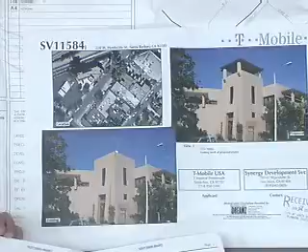Good afternoon, board members. My name is Ryan Shields. I'm here representing the applicant, T-Mobile West Corporation. We've been before you a few other times on this project. To condense the plan modifications, previously we had submitted applications with larger screen walls towards the rear part of the building that borders 101 and the freeway. Subsequently, we're coming back with antennas incorporated into column elements on top of the existing tower feature. Throughout the building there are existing columns and a lattice-type tower built with 4x construction, and now we're coming back with antennas located inside these columns. It isn't quite ideal from a technical perspective as far as the antenna and signal propagation, but it was kind of our last attempt at trying to get something to work on this building.

While this may not apply with your new application, I'll just read the last minutes so that everyone is up to speed: continued indefinitely to full board with the comments. Return with a completely revised plan that does not increase the height of the existing building and does not appear to be massive in scale as the proposed project currently does. Any additions to the building should be appropriate to the architecture and appropriate in scale.

Okay, yeah, we are increasing the height. It was just technically not feasible to do that, both from a signal propagation standpoint, but also to architecturally encompass these antennas in there.

May I turn the page on this? Yeah.

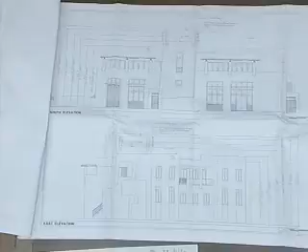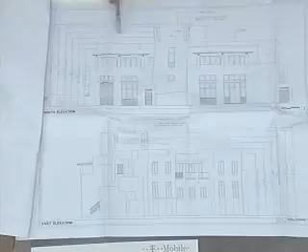So A3 calls out the existing tower element comes out at 39 feet 6. And the columns that exist on the building, there's a landing on the second story on both sides that would flank the tower. These columns currently measure 7 feet 7 to the top of the column, and then about 2 feet of lattice work on top of there. So we'd be proposing to replicate those exact same dimensions and column features on top of this tower. There's about 2.5 feet below the column that we would locate along the existing parapet of the roof and then go up from there. So overall, the height increase goes up to 47.2 from 39.6, which is within the 15 feet allowed by code.

Okay, is that it? That is it. Yeah, the ground-mounted equipment stays in the same location, which is in the rear portion of the building. It's not visible from public view - it's hidden by some decorative plastered walls.

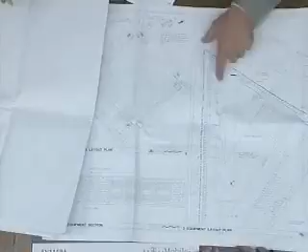I can go back to the site plan. Okay, this is the ground-mounted equipment in the back. You can see the antennas located in the proposed column. And here's the site plan. The antennas will be connected to the ground-mounted equipment via coax cable that'll go up inside of a chase right here, that will not be noticeable. It's kind of blended in, and then it will penetrate the tower right there on the north side.

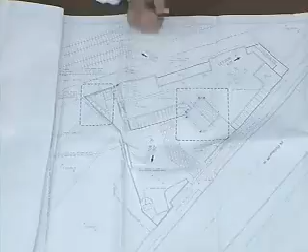Okay, is that it? So with that, I'll bring it open for public comment. Seeing no one, I'll bring it back to the board for questions.

Keith: Thank you, Mr. Chair. So just to reiterate, all the new equipment in the tower portion would be totally concealed - there'd be no exposed equipment at all. That's correct, the only penetrations that would take place - there's about a 2-foot tall parapet back here, so any penetrations with cabling to the antennas would take place below that sight line.

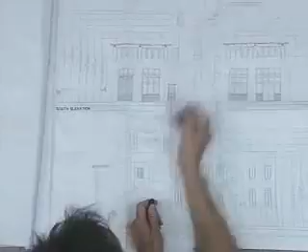I think, let's see how that would be turned. Oh, I'm seeing this beam here. Exactly, that's the larger beam, right? No, that's this beam here. That's what you're saying, exactly. Okay, all right, I get it.

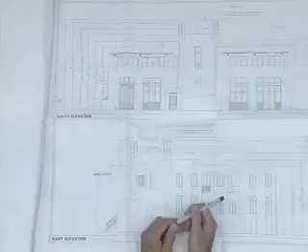I do have one question. I just noticed that the elevation, maybe you mentioned this and I was looking at the plans, but on this elevation it shows columns on both faces, but on the photo sim you only have columns on the east and the west faces of the tower instead of the north and the south. You're showing the columns on the corners, and on the photo sim you're only showing it on the east and the west sides. Are you missing something?

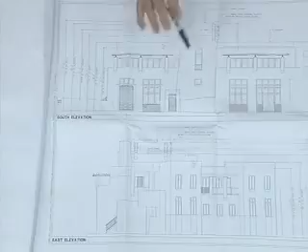No, I'm sorry, you picked that up, and that is correct. This must have just carried through from a previous revision. Originally we had 8 columns, and after reviewing it and taking a look at it, it was too massive, not enough kind of open space in there. So we knocked that down to 4.

Let me find the site plan. So these don't exist anymore. Let me see, those, how did we do that? Yeah, these 2 we took away and those 2. And that was actually at the owner's request.

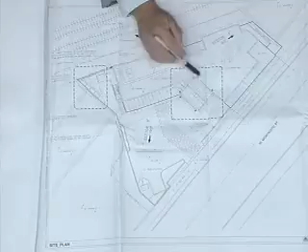Subsequently, signal-wise, we end up losing some from these. We lose these 2 antennas, and so we only can get this one, and that one has to be skewed that way, but that's more on our side than yours.

All right, okay. So, any feedback as far as if you like the 4 columns better than the 8? That's coming next, we just had to ask questions first. Okay, I have no other questions.

Comments? Start with Keith. You ready? Thank you, Mr. Chair.

I think it's a good solution, particularly in light of some of the previous proposals that really increase the mass of the building. I think this integrates with the existing architecture, and it actually makes the building look better. Definitely think you only want the 4 columns. The only suggestion I would have would be maybe study whether these columns want to come a little further down the facade, just they look a little stubby up there, but I'll see what everyone else says. I think it improves the building, actually, so I think it's a good solution.

Thanks, Keith. Dawn? I wasn't here amazingly for the last 2. One was way back when, in 2009. And I happened to be absent at that one as well, but I just reviewed the 2 previous submittals to get up to speed, and I agreed with the last comments, and I think that this solution is vastly superior than the last 2. I think that the detailing needs a little bit of work, but I don't think that it is a negative, massing impact on the building. I like the building as it is, but I don't think this is a negative impact necessarily to the building.

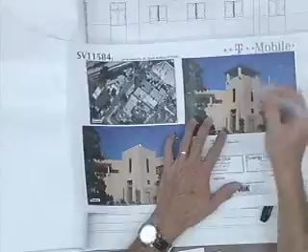In other words, you keep this length consistent, but you lower everything so it slides down the face of the wall here on each side, and reduce the height between that and that. And I think when it becomes like a happy point there, it almost becomes like a designed floating cap to the tower, as opposed to almost a whole new floor that has this trellis on top. You know what I'm saying? So I'm just posing that question to you. I don't know, I'd like to hear what you'd have to say.

You've heard my comments. Yeah, on top of there, from a site plan perspective, sorry about that, it's about a 2-foot parapet or so, maybe closer to 3, but looks somewhere in there. Tall here. Yeah, and there is a roof. That's almost a 6-foot parapet.

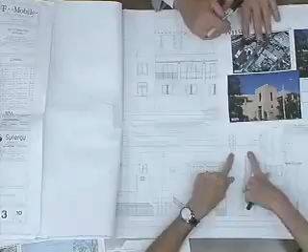No, except that's the header of the window. Yeah, that's the header. It has to be up here. So it's up there, 3-foot parapet. I purposely included the picture of the story pole in there, and that is about waist level on me, so figure 2 to 3 feet somewhere in there. It's right about here because that's somebody standing right there.

One of the things we definitely looked at was structurally what we had to tie into in order to make this work. By the as-builts, there's some 12-inch block down below, and then I believe 8-inch on the top with some bond beams around there. So I think from kind of the system perspective of the building and the structural aspects, to really lower that...

I guess everything's possible. It may be a little complicated on the structural side of things. There's also a skylight in there that takes up the majority of that. That's actually a pretty nice kind of light shaft that comes through. This is an open staircase. So I guess we'd have to look at it a little bit more from a structural standpoint.

I think there's a solution. I think at this height, it just borders on being the addition, just because of the cell phone towers. It's not fully comfortable for me, but I feel it's an innovative solution, and if you could find the ability to enhance both the building by bringing these things down a little bit and possibly bringing all of that down, I think there's a good compromise that could work. That's up to you. We would be talking about only maybe 2 feet, maybe 3 feet if we went to the extreme portion.

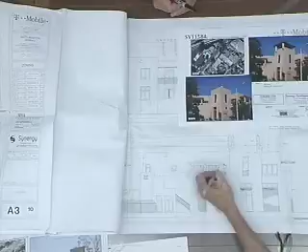Would we like to see it match? We kept that exact same dimension, so that's about 2 feet 7 inches below that balcony edge, and that's exactly what you have here. It looks like this dimension from here to here is just a little bit smaller than this dimension from here to here.

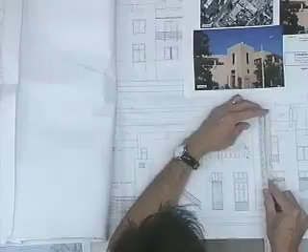So this is 3 foot 6 above the parapet, okay, and this is 4 foot 6. This is 4 foot 6 above. Yeah, okay. And this is about 2 foot 3 or 4 below, and this is 1 foot 9.

I think that the base should be 1 foot 9 below. The base should be the same, if not a little bit more. Maybe exactly the same proportion as here or here, but it is a little wider, so it could stand to be a little bit bigger.

I just think it could be lowered. I agree with you that it could be lowered slightly, but I wouldn't want to see it lowered to make it look like a cap.

So I mean, I see bringing it down more in harmony with this, I think, is a better solution for me. I'd like to see that. So I think that.

One foot 6 or so, something like that. 1 foot 4, 1 foot 6. You know, I don't want to say exactly. I just think it should be closer to this. It should be consistent with what's there now, and I think that's where the design refinement should go.

Is that a motion? So you want to see how it flies? Let's fly it. Okay. So, Mr. Chair, I'll make a motion for project design approval.

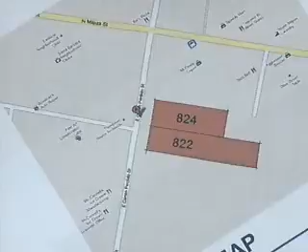So I'll give an update as to where we're at in the process, and Ryan will take you through the design. We've been working with staff and gone through a PRT process, and a couple weeks ago we presented to the Planning Commission for conceptual review as well, because we wanted specific feedback on some modifications we were requesting. Those modifications primarily were first for a reduction of the parking requirement. We're proposing one vehicle space per unit, plus the 3 required guest spaces on site. No modification there, just for the 1 per unit.

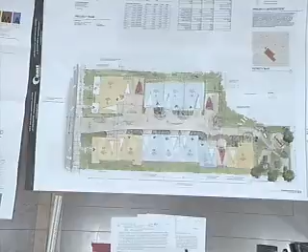A modification for building setback between these two buildings, a modification for the bonus density of 12 units, and a modification for reduction of the setback in front per implementation of the pedestrian master plan. Ryan will take you through the specifics of that. The Commission was very supportive of the bonus density and very supportive of the parking modification as well. Back and forth on the building separation, but understood it, but really requested that we not come back with any modifications for the front setback and to implement the pedestrian master plan. So we'll show you what that means in more detail as we go along.

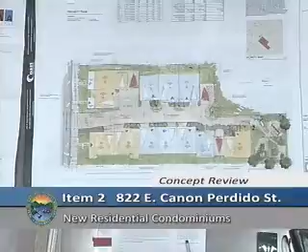So the project was purchased through RDA funds at the end of last year, and we're moving ahead quite quickly. The project represents new homes for 12 families. We've had very good feedback from staff and the commission as well, and it's important that we came to get your feedback too as we develop the design, so that when we submit our formal DART, we're really well set up to move through expeditiously in the process. So we look forward to your comments, and I'll hand it to Ryan for the design.

Well Chris, do you want to set over here? Do that.

Okay, we'll start here just to locate us. So we're one parcel off of the corner of East Canon Perdido and Milpas. There's a commercial property to our east, right up against the property line and the right-of-way here, and then this is a Taco Bell parking lot towards the back. So we have primarily commercial along Milpas, and then to the west and south we have a two-story apartment building and more dense apartment-type housing, and then sort of a mixture behind us. So site selection was very important for this project.

And then also amenities for this being a low to very low income project, 100%. Those amenities became very crucial to the site selection.

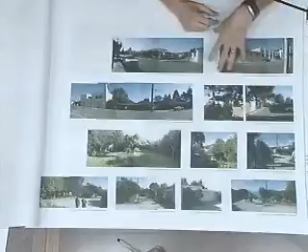Here's a view towards the back, looking back at Milpas. There's our power pole, and at the very back of the parcel, these are two parcels. One has a deeper portion, seen here, which you'll see in a little bit. We've selected it as a common open area because, despite its proximity to commercial projects at the corner of Milpas and Canon Perdido, it's very private to the existing neighbors and quite serene for the parcel.

So, neighborhood context. One of the goals we have with Habitat is that they enjoy anywhere from 40 to 70% volunteer workforce to execute their projects. So one of the design directives, which they've done on previous projects in town, is a siding type project, something that's really friendly for people to put on a belt and swing a hammer, and just about anyone can do it. So that was a request to do a siding type project.

So we took a little survey, and this is a sampling. There's more, but these are some of the better examples of architecture we thought we might draw from, all within 1 or 2 blocks of our property. So it's a sampling of turn of the century, modified or pseudo craftsman, or just early California type architecture, which we're going to draw details from.

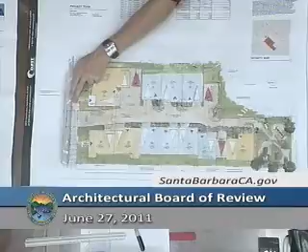Actually, let's go back to the site. So with that, where we landed, we studied quite a few layouts and how we might do this thing from scratch. Really where we landed was a center drive aisle project, observing more or less the existing location of the driveway and trying to maintain the existing power pole and guy wire.

Again, besides volunteer labor, we are mindful of cost. They fundraise every penny to do these things, so we don't want to spend money where we don't have to. In addition, we studied any which way we could do this, and this seemed to be the most efficient to comfortably sit 12 units. So we have a center drive aisle, and two sides we split 5 and 7 units.

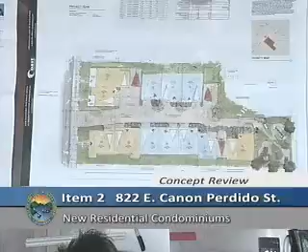The units to the east consist of 2 and 3 stories. The 2-story elements are in gold, obviously at the front for massing, and in the back we did another 2-story, and then the 3-story units were pushed towards the center, utilizing the big site change you see in the topo, so they nestle nicely in the middle of the site.

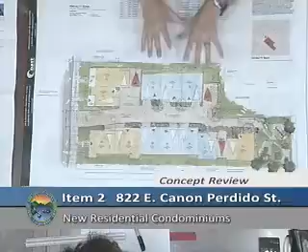Here on the east, this row, we actually took units 1 and 2 and broke them off the main building and turned them 90 degrees to address the street. We thought it was really important for these front units to not be the side of this project, but truly address the fabric of the streetscape, which we have elevations to show you. In doing so, we were also able to create space in between, just for air and peeks of views, but also ended up being for guest parking requirements as well.

Here on the western side is a longer run, and we're up against, here you see at the bottom, the existing 2-story apartment building. We were able to break away towards the back for guests. We looked at parking back here too, but...

One of the important features to us was this common open area. We actually fitted it in a couple places, but we wanted it to be more than a token place. This project is a 12-unit project, the biggest for Habitat, and they intend on having more families here than usual. So we really wanted something beyond token, a really nice, safe community and play area for the kids, and a safe place for all the families to use away from the street.

Let's see, am I forgetting anything, Ed? Oh, and then connections.

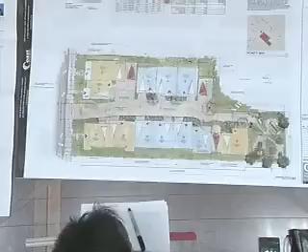The layouts we chose are townhome units. For a sense of pride of home ownership, one of the things we looked for was private garages in every unit. In addition, we wanted to, wherever possible, do a direct connection to a private yard. It's something that's challenged in low-income housing, but we have a private outdoor yard for nearly all the units.

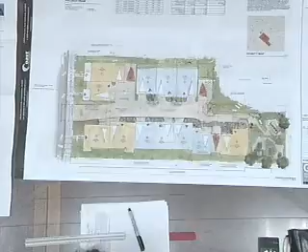Where we don't, like these smaller 1-bedroom and 2-bedroom units up here, they can have the front yard setback space. We have a covered porch area that is really for their unit, and in addition we have private outdoor areas on decks above in the back. But wherever possible, we wanted real private use for family time, for barbecuing, and then also as a relief, the community area.

Here's a roof plan. Actually, before I do this, why don't you talk about some of the sustainable goals we have, because it plays into the project.

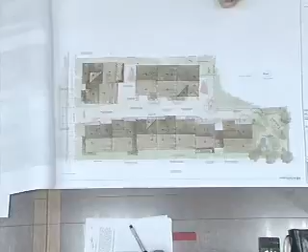Habitat is always working to be very good stewards on all the projects, and they've had a lot of success around the country of being a good builder, and they're one of the largest builders now in the country. So locally, they've challenged us to come up with as green a building as we can, and this is something that we've grown some skills in applying passive house principles specifically.

How can you get the most for your dollar on projects like this? When you can passively heat and cool spaces by reducing your active systems, that's the type of solution that really resonates with this client.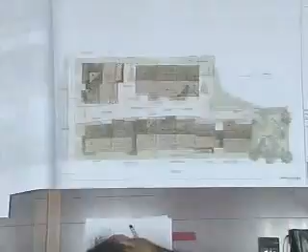So we've done some initial energy modeling, with fairly standard construction types and a couple of key details. And the roof spaces that we have, utilizing those for solar, thermal, and also photovoltaic, we are getting very close to a net zero building.

All that will be worked out through the fine-tuning of the design as it's further developed, specifically those systems. But it will also affect the architecture a little bit, which we've touched on and hinted towards, but certainly for project approval in the next phase, we'll talk more about those details related to shading and also window locations and sizing.

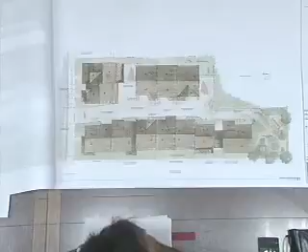And the solar opportunities. But for the most part, we have the benefit of a very mild climate here in Santa Barbara, which is, if anywhere you can do net zero, it should be here. So you'll see some of that as we go through the process.

As part of our PRT and DART, they were sort of asking us to identify the area we're reserving for those systems. So this is the roof plan that shows you the south and west orientation. Well, it's truly southwest here and southeast here. It's our fun Santa Barbara axis.

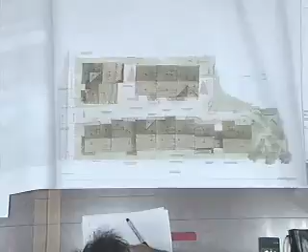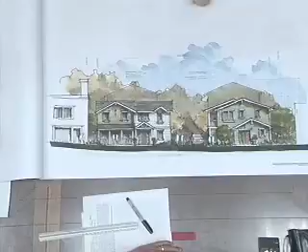Okay, so here is the Canon Perdido elevation. This is really the face of our project. Here's that commercial building, that commercial face to the east there, and then you can see in the architecture we're trying to address individual units again for that pride of ownership. That was really important to the homeowners in past projects, and it will be. So again, the kind of early California elements, we want to create as much variety as possible.

Without getting too fussy or creating too much cost, we're looking to get alternate colors perhaps on the siding, perhaps alternate patterns, probably looking at a Hardie panel type of siding on this project. Vary asphalt shingle roof colors wherever possible, at least between buildings, if not closer to individual units. And while trying to have some sort of scale of efficiency with windows, we want to mix them up, but we're going to try to get uniform sizes and play with them as much as we can.

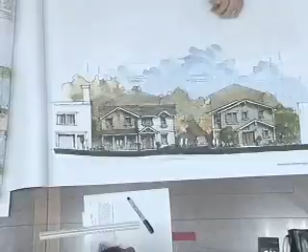These three units are addressing the street, and the front doors—we've adjusted the units so they actually will be the front doors, so they're used properly and not some sort of token. We have a full porch here on the first floor, a little covered entry here, and a little entry one-story element here. Here you see some of the second-story elements as they go back.

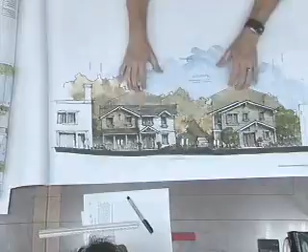And then the three-story massing I did just in this khaki color. It's pushed back—both are approximately 65 feet back from the property line, just to give you context. And we have some perspectives to show you how that looks in view.

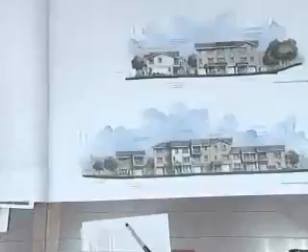This is the driveway elevations. This being the longest gives you a good idea of that individual unit flavor we're going for. Again, trying to vary color and materials as much as possible.

We're introducing a couple unique elements, some cantilevered porches above we have in a few places. Some of these are required, some are not, but we want to introduce some different components along the way.

We have room to play with covered entries, we can add some detail there. And then here we added a gable just to break up this three-story mass.

This unit's set back, and here's our space for parking, which we're covering. We're still studying some of these, but we'd love to have some feedback on these parts. You can see there's garage doors on the base next to the entries. Every entry will be covered.

Turning around looking towards Milpas, here's units 1 and 2, we're sort of seeing the side of them. And here you can see a couple of the outdoor porches or patios above on the second floor. Again, just trying to create little virtual townhomes for the families.

Here's the grade where Taco Bell parking lot sits up higher. These are existing, there's a cluster of existing mature trees on their property that we'll maintain. And here's that neighboring commercial building relative to us, right on the face there.

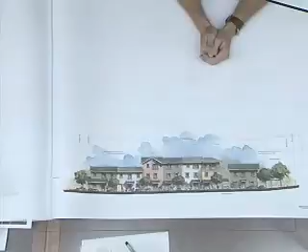This is an important one, this is the elevation facing the two-story apartment building, so this is a neighbor's view. Again, just pulling the materials or the virtual buildings through to the other side. There's our two-story, then we step back to the three.

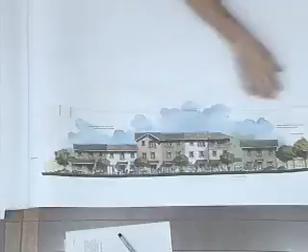This third-story element is pushed back, and here's our last second story and our common open area beyond. These show our building envelopes relative to the existing grade, which changes a little bit.

So this section is drawn through the middle of the site, kind of at the most aggressive massing, just to give you context. Over here on Milpas, here's our commercial lot towards the back. Here's a one-story commercial element, and then they have this angled retaining wall, and it kind of shows you. This is existing site.

We're filling approximately 4 feet at the lowest to create positive drain and meet all the stormwater management practices. So it's a balance between trying to engineer as little as possible, but to make all that work. So we're filling about 4 feet, and even so, you can see the context with the one-story element.

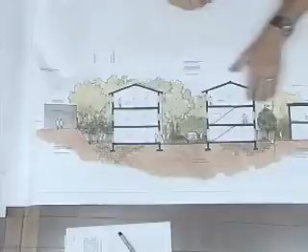To the east there, slice through our project, and here's the two-story apartment building to the west. And we're meeting the plates, we're matching their plates so far. We're 8, 9 in the middle, and then 8 again at the top.

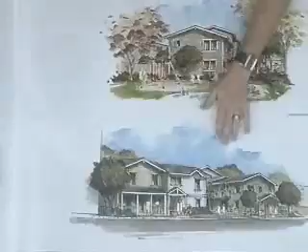And finally, since we had a model that we used for design and energy modeling, we picked a few views which we thought were important. This is the Canon Perdido view, so you can see it really disappears. We're across the street up against the other commercial building, so you can see the third-story massing really disappears.

You obviously see it as you look down the drive aisle, and then it kind of peaks. This is the one on that side, it starts peaking up. And then here's a picture of our common open area in the back, again, just to get a sense of what it would be like in that space up against these buildings.

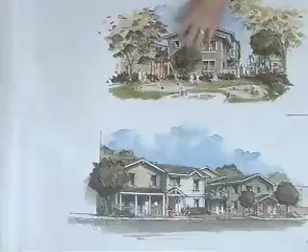So this two-story massing in the back kind of helps bring the scale down, and we're working currently with Ashley and Vance on the civil and Katie O'Reilly Rogers on the landscape. And that's it, so again, this is for conceptual review and comments going back to our PRT and DART process.

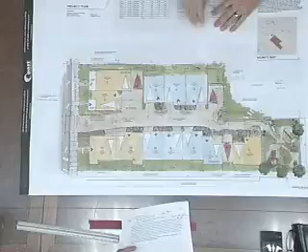A couple more questions, some mundane site plan things. Trash enclosure - you have that somewhere? That always is a stickler. We've been working with MarBorg and Thomas Oreski at the city regarding parking. We're providing trash, recycling, and green waste in each individual unit, with ample storage usually behind the garages on the ground floor - individual storage locations. We've already worked with MarBorg on a pickup plan. Planning Commission was concerned about 12 cans on the street, so we're not doing that - they'll do backyard service. Cans go out in front of garages and get picked up. It's all individual, though there may end up being a community yard waste or compost area.

In the PRT, did transportation have any comments about your backup out of that? We worked closely with Chelsea, or Ed did with Chelsea, and got turn templates out. What you see is a conceptual sketch - we've modeled it, and we're still tightening it up and adjusting things, but they're clear on top of that.

The last couple questions: it looks like on the elevation and your plan, this porch kind of got switched. I'm sure that'll get worked out - it's a unit flip in the wash.

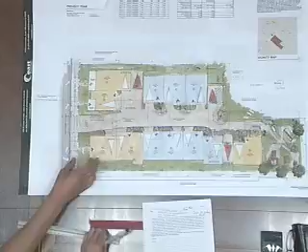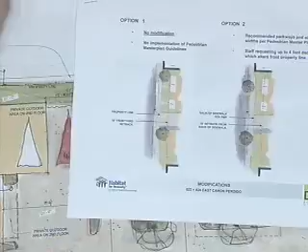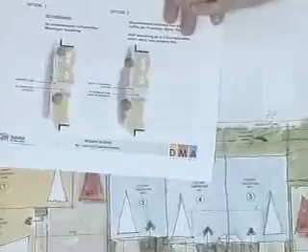Regarding the front yard setback modification, does this represent a proposed alternate, or what's the alternate if you can't get that? Let me show you that again. We haven't tightened all these graphics, but what it meant, at the end of the day, to implement the PMP, was in addition to our 10-foot standard setback, another 2-foot-9-inch dedication, so we were showing options. What we proposed to the Planning Commission was that we could potentially have a couple porch elements encroaching, but they urged us to squeeze out of it completely. We haven't tightened the design yet, but we have space all along the way, so we're proposing to just get out of that. All these elements will pull back a little bit, and we're still playing with the inches and feet here.

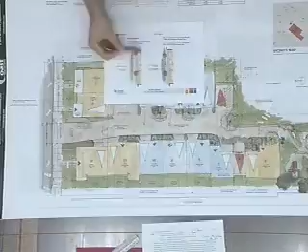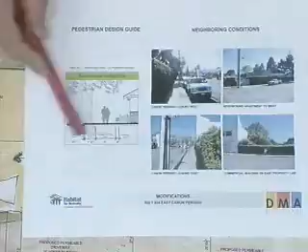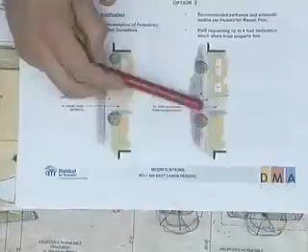More specifically to the design and what it means in the pedestrian master plan, there are guidelines for different intensities of projects and neighborhoods. Here's the recommended configuration for a residential area: a 6-inch curb, a 3'6" furnishing or planting zone, a 6-foot sidewalk, and a frontage on the property. Transportation would like this to go to 4 feet, so adding them up, it's 10.5 feet. The current curb face is about 7 feet, varying between 6'9" and 7. So the 2'9" dedication would essentially be the sidewalk - the back of sidewalk would push back to that line, creating a parkway opportunity in front for utility metering, and we're looking at maximizing green space for what the utility meters don't take up, but it would have to transition to both sides as well for now.

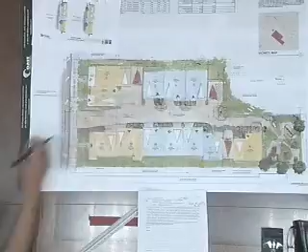One last question - I noticed this is a covered guest space, and if there's a connection between those two buildings, do you still have to do the separation modification, or is there some way around it? This one is covered - it shows on the elevation. I guess what I'm suggesting is perhaps there's some way you can connect those and get around that mod. Yeah, sure, we're still actually looking - we're studying, trying to bundle some of this parking, so some of those pieces are still moving.

Okay, thanks Keith. Dawn, I had the same question about the mod because you showed this space is covered, and I was asking why you needed the mod when it was a connection. Right.

So I don't need to ask that question. You keep... so why did this project go to Planning Commission? I didn't understand that part.

We asked to go to PC concept review as early as possible because of the parking mod, the 1 space per unit. That was a big deal. If we didn't have support for that, it would have been huge, obviously, since parking affects everything, especially with a density like this. So we just wanted to see if they'd support us early before we got any further. Their final outcome was fairly unanimous. They had very strong support for that.

With no controls on how they control it? Or do they enforce and control it? They want, again, that's the conditions of approval - those HOA conditions are part of the conditions of approval to the project, not to the property owner. So it ties to the property when they take their final action.

I might add, the thinking behind it was that city requirements for 100% affordable housing rental projects like this are sufficient - they demand one parking space per unit. This project is unique because it's home ownership, due to what Habitat provides for home ownership. But essentially it's the same renters as would be in any other typical 100% affordable project, they just get a unique program through Habitat to become homeowners. So it's the same demographics, same income levels as a rental project. That's really what helped Planning Commission support it.

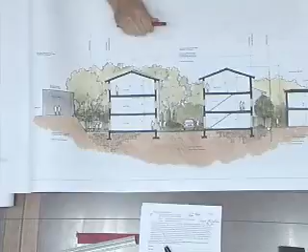Will there, at street level, be any proposal for grade elevation? Along the street on the west end, it's at about 21 feet currently. As you get to the commercial property, it's about 23.5 feet. So it slopes between 2 to 2.5 feet across the 103-foot property, and we'll be pretty much right at that 20.5 foot mark there - equal getting to the back of sidewalk. This has to meet accessibility requirements, so in this building along the front, we have an accessible path from the front sidewalk all the way to the back common area, and the 2 required accessible units will be served off that.

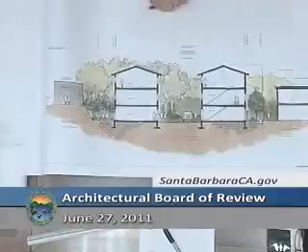So retaining walls, these two sides level at the street level, with a little increase in the back. Actually, the side closest to you, we're filling up 4 feet, so we will be even. We're actually filling against the retaining wall, eliminating an existing retaining wall on the west side.

Then there was another question I had about roofs. I saw a notation on here, either on the elevations or somewhere, about just changing the coloration. Is there an elevation change between these roofs? Again, being early, we're looking at that. Nothing great at this point.

As we work with Civil to fill this site, we're going to look for opportunities, especially on the eastern block. If we can break that, the pads or the finished floors may be breaking. So we're looking for those opportunities, but it's hard to say now for sure.

Okay, and I think as far as parking goes, I don't know if it's within our purview, but the public has a good point on that. One of the things I was concerned about is the guest parking. So there's 3 guest parking spaces, is that correct? Yeah, there's 3 guest parking. And would off-street parking be permissible with this, or would they not be allowed to park off-street like some of the housing authority projects have?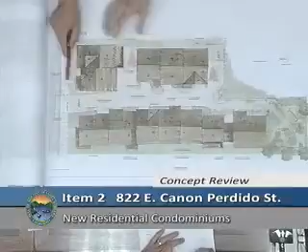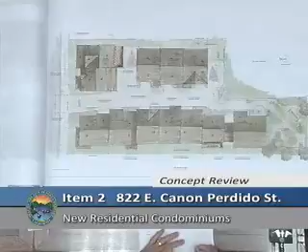Number 1 was the bonus density, which obviously the Planning Commission supported. Number 2 was the parking modification, again with support. And then the space between buildings—at this location, yeah, the required space between buildings was our third modification. And then the front setback, observing the pedestrian master plan, was the other one we requested. There's a total of 4.

Previously in our application there was 5, because we were going to request the space between buildings down here as well, but that's gone away so far, as others may as we study this further.

So I think Keith and Don sort of touched on this before, in that you don't have a covered guest parking up towards the road. If you did cover that, does that negate the need for modification? That's here, yeah. If it was covered, yeah.

My only other question, and I think you sort of touched on this a little bit, is in regards to the open space. I was going to ask if you had thought about centralizing it within the site somewhere a little bit more, so there's equal access to it. It sounded to me like it was maybe just a better location at the back.

There was—we looked at that. There's a few reasons why we put it there. It just, as a whole team, struck us on our site visits at that location. There was just something about it that felt really good as far as privacy and noise.

Okay, I have no questions. Most of the questions have been asked already, so I'll go on to comments.

Keith? Thank you, Mr. Chair. Talked about the site plan—I think it's the right site plan, the right diagram. I like the way the front units address the street. I like the location of the open space. Again, having worked on similar long sites like this, that's the most efficient layout, so I think that's good.

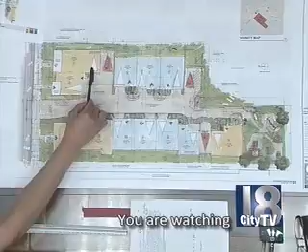I think if you can connect on this conundrum here, I would rather see these two buildings connected than pushing this over and combining. I like the way you've broken it up with small gaps. So I think shoving this over to the property line, particularly with 3 stories, would not be a positive move compared to connecting them. So if you can get around that modification that way, look into that one.

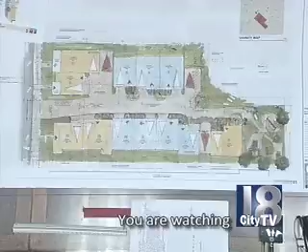So that being said, about the trash - I know having them in the garage can seem like a simple solution, but as you develop your landscape plan, really look into having places out front where people can leave them for collection that aren't in landscape areas, because I've gotten burned on things like that. So as you develop your landscape plan, look at that.

I think also as you develop the landscape plan, further down the road we'll want to see the window layout of your neighbor apartment building, so you can address privacy conflicts with the neighbors through the location of your windows and landscape use. I think the townhouse is a great solution for this type of ownership project, and having private rear yards so everyone has their own private open space is great.

Architecturally, if we go to that elevation - maybe the long one, that's against the neighbors - this is sort of our... I guess I'll buy into the use of siding, although having novices up three stories on scaffolding hammering, I don't know about that, but we'll set that aside.

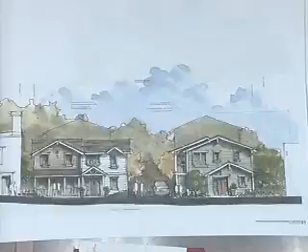So it has that kind of proportion, and this one doesn't so much. I don't know if it's a deal breaker, but I really like this one. This one I don't dislike necessarily, but I didn't quite understand why one portion of one of the buildings you showed as stucco, and then the rest of it you showed as wood siding - I guess that's really a question. We'll have to look, but being conceptual at this point we're not set. I may have left one bay - is that one bay of one building? Well, it's actually the middle portion of one of the buildings, right here - as conceptual I was just sort of looking at that. So I would maybe not do that if the whole building is going to be wood.

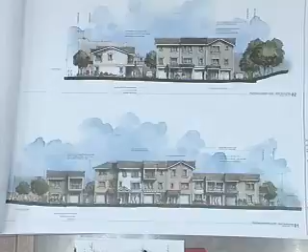I was actually going to say that I think there should be garage doors. I don't really design for keeping things open just so people don't convert them into livable space - I would prefer to see whatever's going to be in the garages, whether cars or anything else, be hidden and safe. So that would be my preference. And I like the open yard in the rear - I think it's a good spot, a safe spot where people could keep an eye on the kids, but if it's in the middle it'd be kind of a sound trap, and everybody would be really loud in the center.

Roof line breakups I mentioned. I think, like Keith said, you can eliminate that mod by connecting the two buildings with covered parking when you put the garage doors on, hopefully.

But I'm not usually in favor of supporting front yard setbacks. I don't know of any instance where we've really done that, and we try not to set a precedence for doing that unless there's some really good reason why it has to be that way. This is a pretty long site, so maybe relief from the pedestrian master plan is an easier way to go. Seems like an excessive setback, and I'm not sure why it is on that street, but that's my take on that.

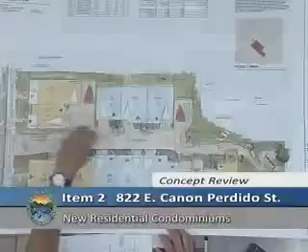The reason why I say that is I put myself down in this corridor, and I walk down this corridor of this 3-story building and this 3-story building, and I try to feel what that's going to be like. And it feels very tight. It doesn't feel airy at all. And when we talk about trying to make mods go away, I have that feeling, it impacts me when I have to make a statement about the mods, when I get that feeling that things are tight.

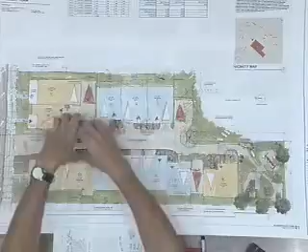So it's almost like I'd love to see you not have a mod for buildings being too close together. And at the same time, I'm not quite keen on the solution to put a roof there because everything feels so tight. The fact that you open it up and let light come in between these two masses, I think is a really good thing because it lets that corridor breathe, right? So there's a pulling and tugging there for me to be able to say that I'm really happy with the mass, bulk, and scale. But I think that you are in that zone, and you really have to work at massaging this to make it work. On the front mod here...

I have a little sympathy with what Gary says, and on the other side, I tend not to want to give up on the front yard setback. What I'd like to see is, when you come back, I'd like to be convinced of whatever direction you take. Because the little drawing that you showed, what they want to do is bring the sidewalk in and put the little median there. What I wouldn't like to see is that you ask for the mod, it pushes the building up, and then instead of pushing this in and having a green space, they just have a wider sidewalk. In effect, all you get is less green, but you get more concrete, and it goes in.

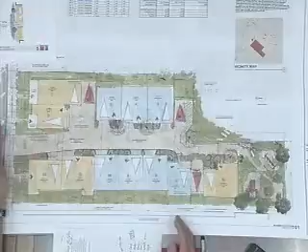I'm wondering if that's really a benefit. It depends on how this pans out in your proposal and how it meshes with what they're proposing. If I say no to the mod and they put that green space in, it becomes a nice walkable thing with green on one side - that's a huge benefit. If I say yes, give the mod, and we just have wider concrete slapping up to the corner of this building, I don't know if that was a great decision.

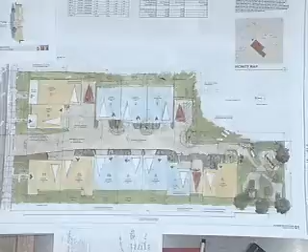So I'm looking for you to convince us when you come back that the direction you want to take is going to reinforce the betterment of the public in that regard. And I think you really have to look at the trash again because this is being tight, that sort of thing.

The last item I want to talk about is the style. What you've done really looks good, but I fall on the side of Keith here, who is saying be careful about the Disneyland-esque pattern. The other side I'm sensitive about is that Habitat for Humanity have built these buildings all around the country, and a lot of places they've built are single or two-duplex story structures with nice yards and that sort of thing.

You see a lot of pictures of people building these things, a house over there, one here, one here. I don't see a lot of these where it's this tight conglomeration. When I see that you're applying the same architectural style with the siding and stuff, I kind of wonder if you should give yourself a little more thought as to the style you really want to use.

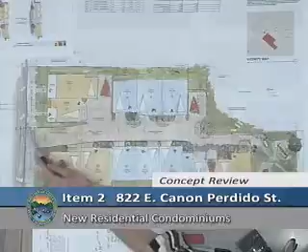Right, okay, well I don't want to belabor this, but my point is that it's because those units, it's their only private open space. Well, it's the one they're using.

You're pitching to us that you're providing the covered porches as an amenity along with the common open space, as a place for people to hang out, sit, and grow tomatoes or whatever. Maybe that was Gary's comment.

But because these are the spaces for the residents, all the more reason they don't have big backyards. These front two units don't have big backyards, right? The other spaces do. I'm sorry to interrupt, but they do.

Just to be clear, I agree with you, these actually have required open spaces in the back on the second floor. They have those. I'm talking about the ground floor, where they're going to barbecue and have people over.

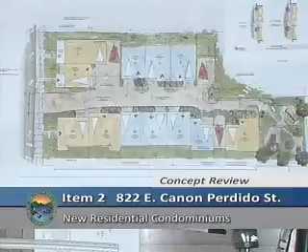If that's the only space, I'm concerned about it being too close to the street. Just like my house, I have the parkway I have to maintain. So I think it's a bummer that you guys are having to move the whole structure back, and then you have this parkway you now have to maintain, but it does nothing for privacy for your residents.

But just to be clear, we intend to observe both of those, the traditional setback and the pedestrian master plan. That's the direction we're trying to get to. We did initially propose a modification through planning commission, but they had very strong feelings to make us observe both. So that's what isn't reflected here, but our intent is to get there.

Okay, I missed that, maybe I didn't make that clear enough. Did you guys get that too? I've been making comments about my concern when I didn't know you were planning on bringing the building back. Sorry, no.

Okay, so if I could have a motion that would give them indefinite continuance and that would just hit some of the points that we made for them to consider when they're massaging the building, that would be good.

Thanks, Keith. So, indefinite continuance back to full board with the following comments: the board is supportive of the site planning and overall mass, bulk, and scale of the project. We look forward to the applicant coming back with a preliminary landscape plan.